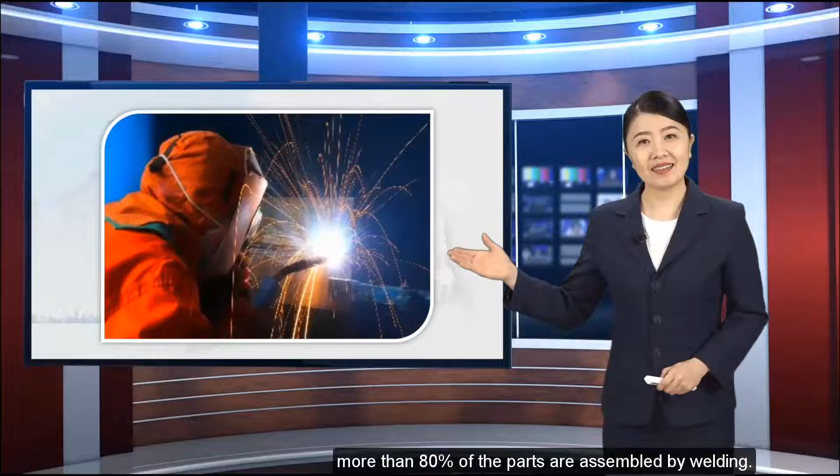The various buildings, bridges, pressure vessels, ships and even aerospace equipment. In the process of manufacturing, more than 80% of the parts are assembled by welding. Because of their size, they have limitations in turning over, especially when welding the outer plate. Nearly half of the welding work needs to be completed by vertical welding.

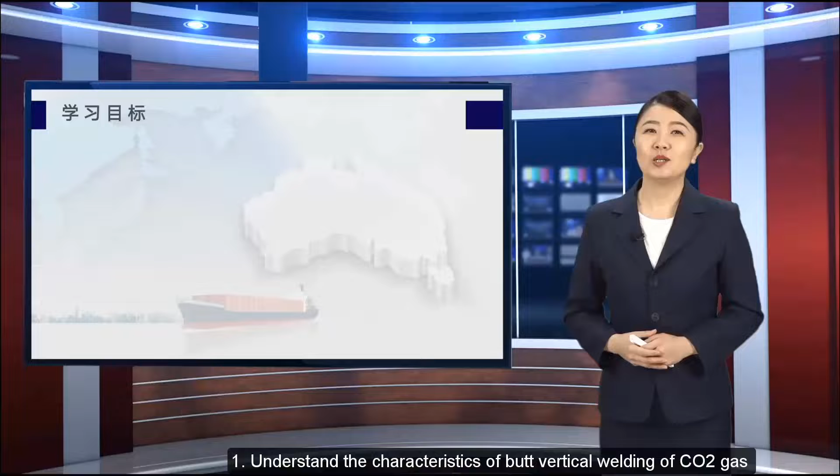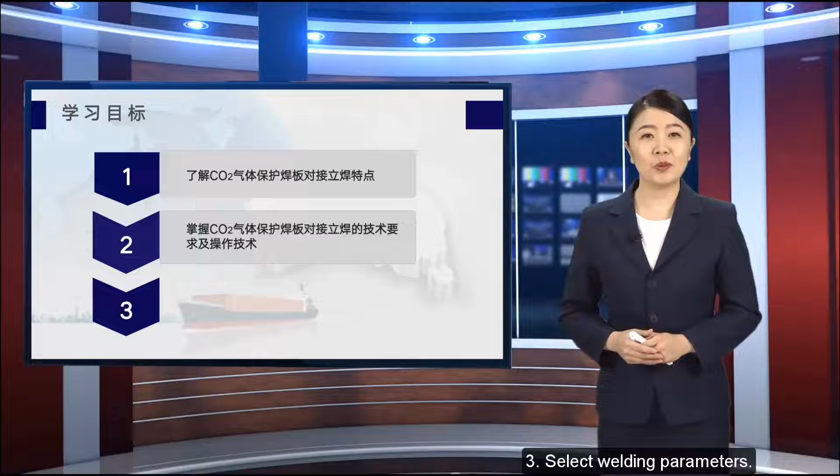Today we will learn CO2 gas shielded welding plate butt vertical welding. Learning objectives: 1. Understand the characteristics of butt vertical welding of CO2 gas shielded welded plates. 2. Master the technical requirements and operation techniques of butt vertical welding of CO2 gas shielded welded plates. 3. Select welding parameters. Please watch the animation on my right side.

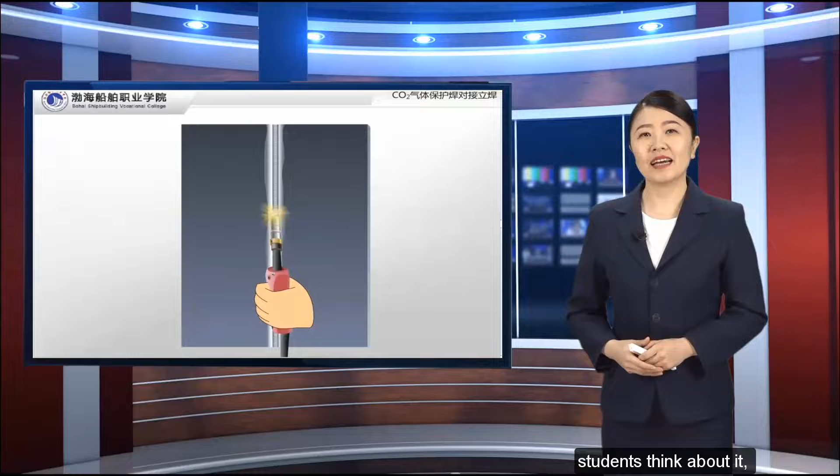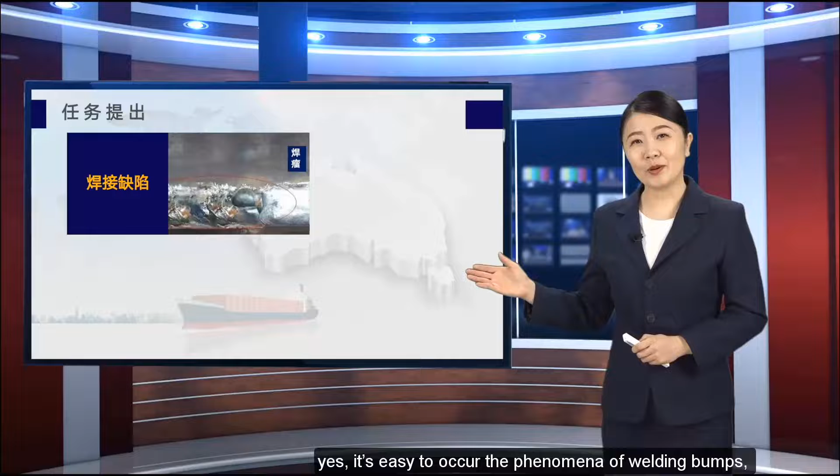It is not difficult to see that since vertical welding is performed perpendicular to the horizontal plane, students, think about it. What defects are prone to occur in the welding process? Yes, it's easy for welding bumps, undercuts, burn-through and others to occur.

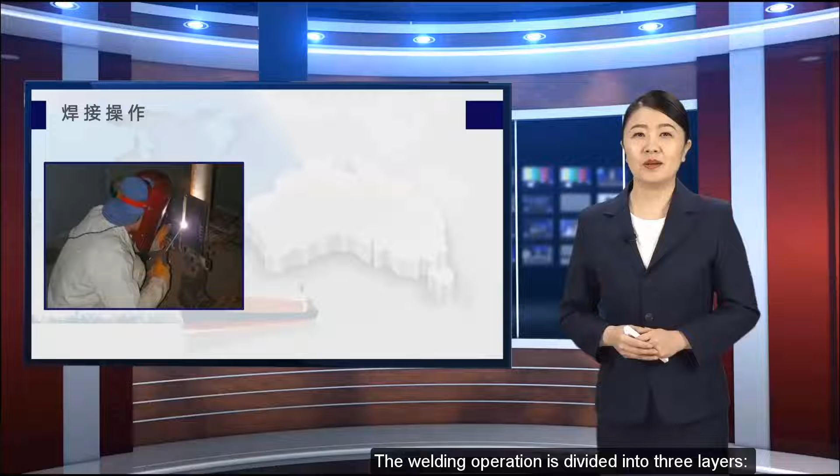Next, take a steel plate with a thickness of 12 mm as an example to explain the vertical welding operation of CO2 gas shielded welding. Please read the workpiece pattern. Complete the weldment production task, and meet the technical requirements of the workpiece pattern. The welding operation is divided into 3 layers: the bottom layer, the filling layer and the cover layer. Please follow along with my video to learn.

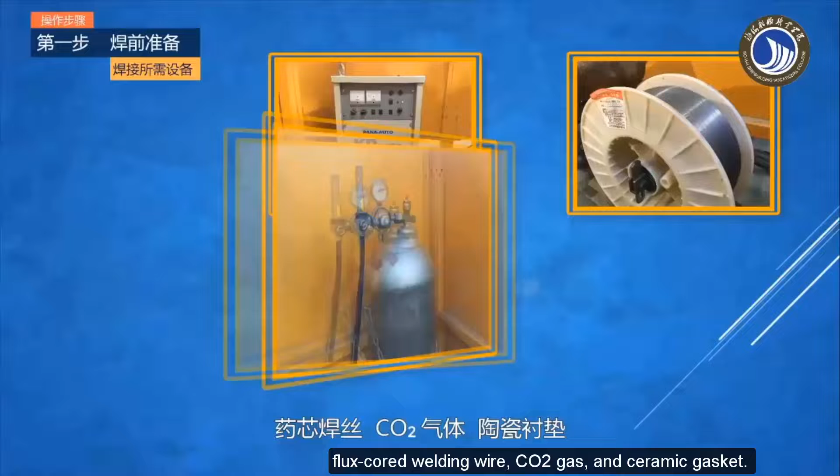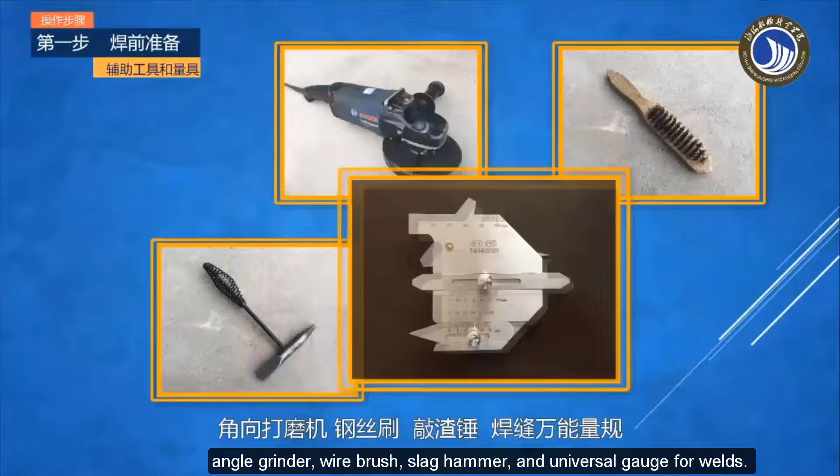Step 1. Before welding. The equipment required for welding is a CO2 gas shielded semi-automatic welding machine, flux-cored welding wire, CO2 gas, and ceramic gasket. Auxiliary tools and measures include angle grinder, wire brush, slag hammer, and universal gauge for welds. Labor protection equipment includes head-mounted mask, work clothes, gloves, protective shoes.

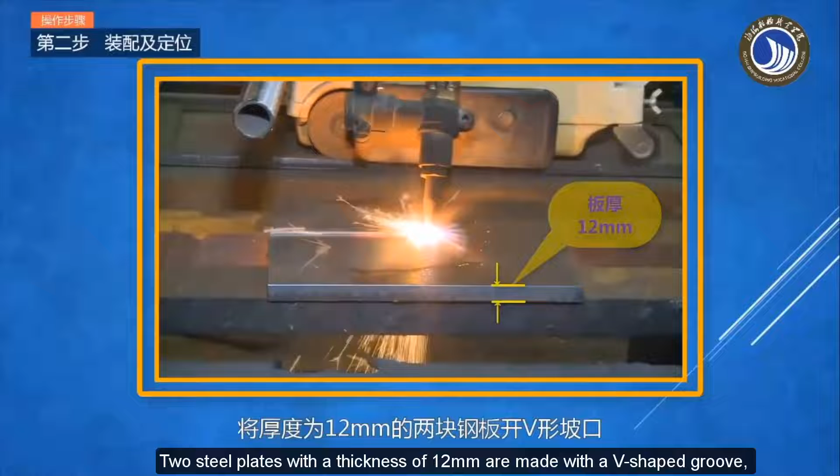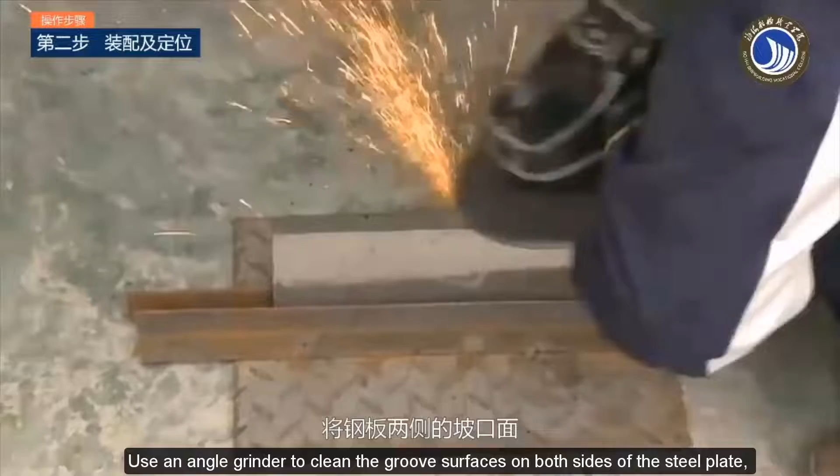Step 2. Assembly and positioning. 2 steel plates with a thickness of 12 mm are made with a V-shaped groove. The groove angle is 60°, and the blunt edge is 1 mm. Use an angle grinder to clean the groove surfaces on both sides of the steel plate, as well as oil and rust within 20 to 30 mm of the groove edge.

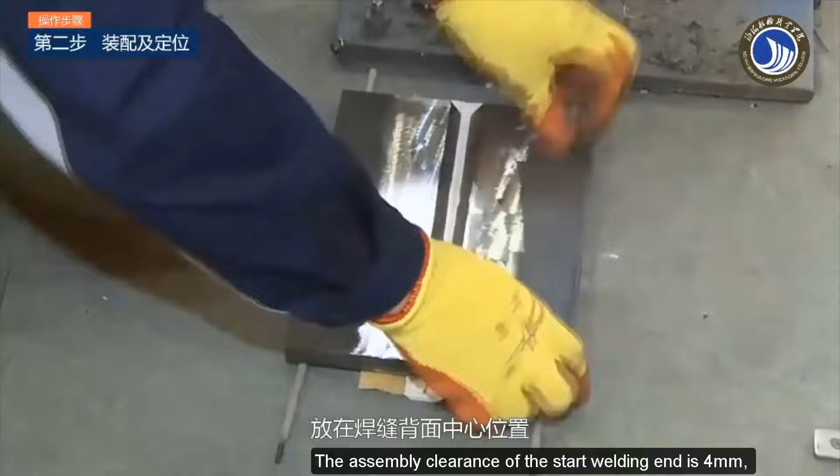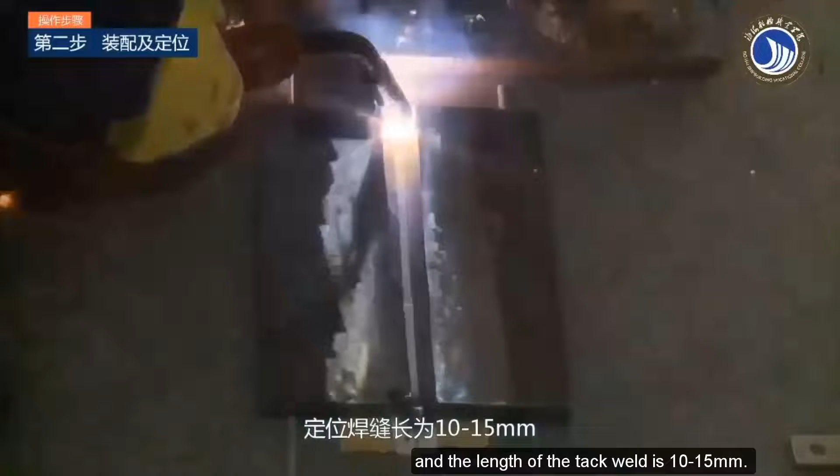And place the ceramic liner in the center of the back of the weld. The assembly clearance of the start welding end is 4 mm, and the end welding end is 5 mm. Tack welding is performed on both ends of the steel plate, and the length of the tack weld is 10 to 15 mm. The ceramic backing is then fixed to the back of the weld, and the anti-deformation is prefabricated at the same time. The amount of inverse deformation is 3-5°.

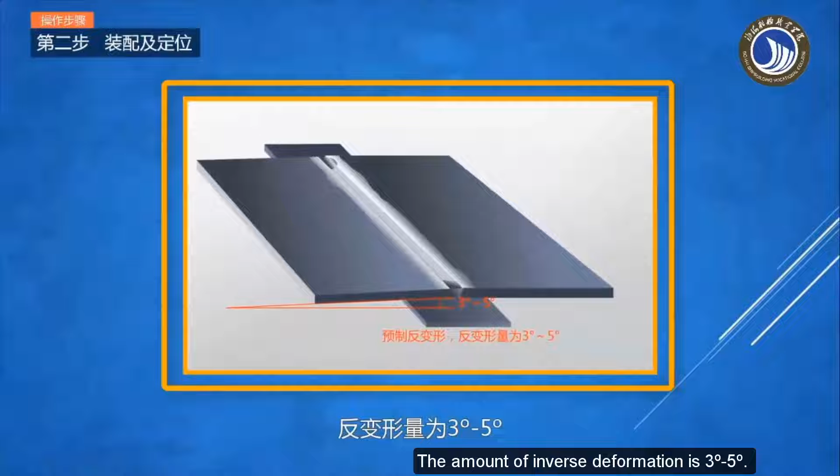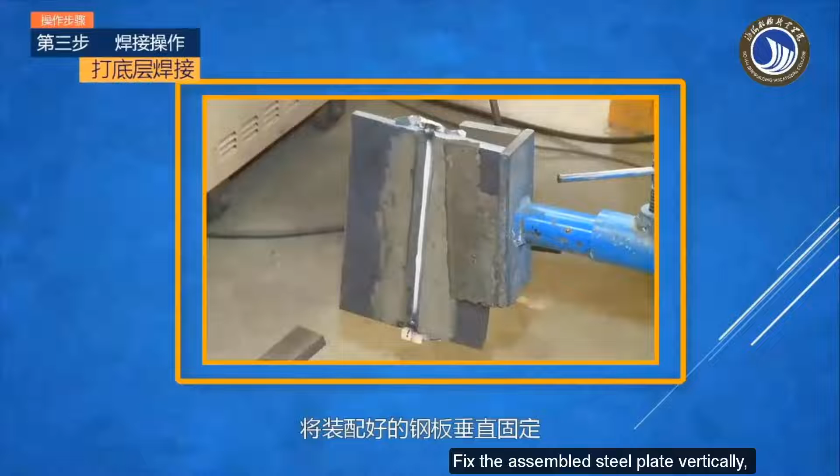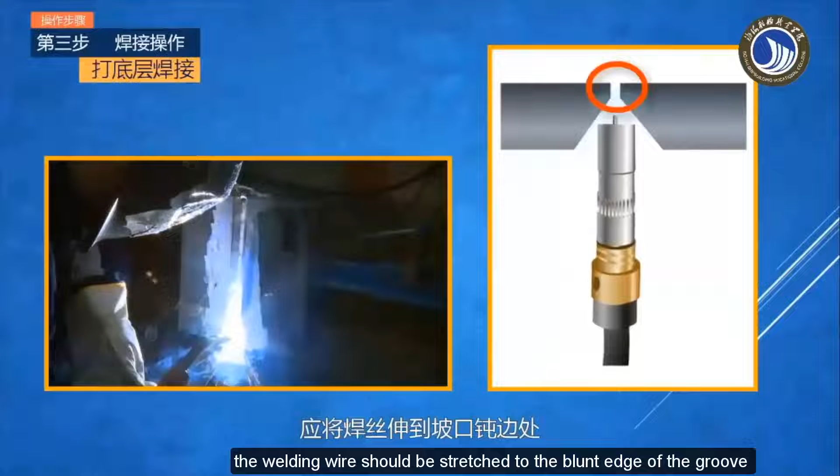Step 3. Welding operation. The welding operation is divided into 3 layers: the bottom layer, the filling layer, and the cover layer welding. Bottom layer welding. Fix the assembled steel plate vertically, and use a small current to weld from bottom to top. Start the arc at the lower end of the test plate. When starting the arc, the welding wire should be stretched to the blunt edge of the groove and swing left and right at the root of the groove.

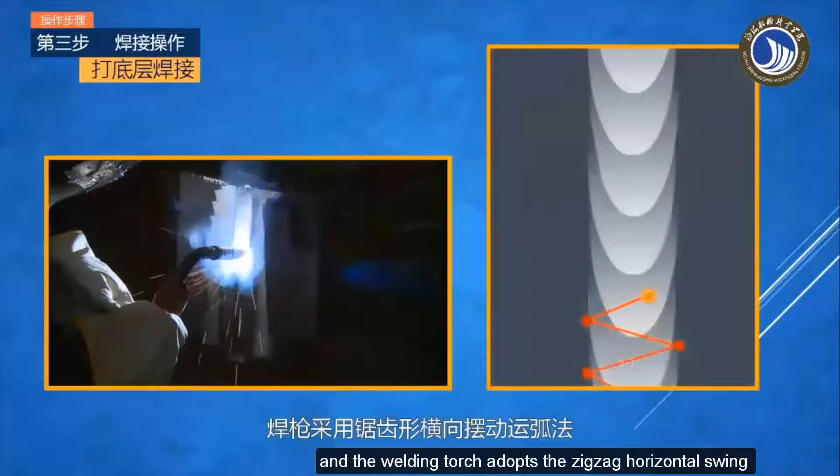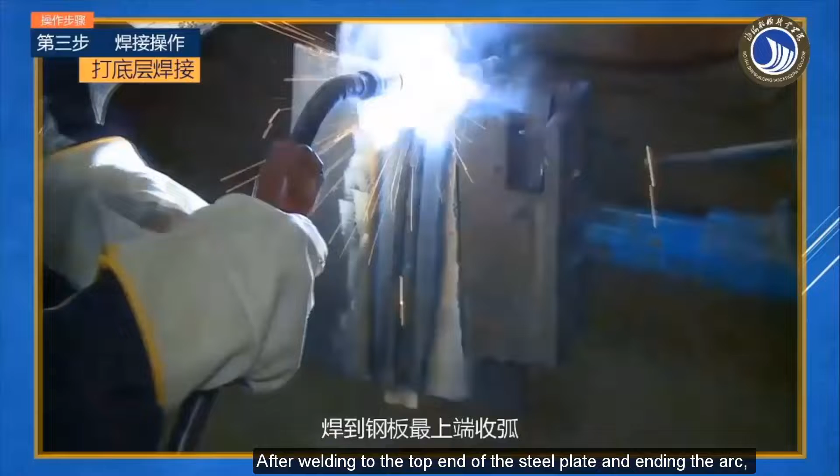The upward inclination angle of the welding torch is 75-85°. The angle between the welding torch and the weldment is 90°, and the welding torch adopts the zigzag horizontal swing arc operation method. When welding, pay attention to holding the gun steadily, and the welding speed should be uniform. After welding to the top end of the steel plate and ending the arc, the welding torch must be removed after the arc is extinguished and the molten pool is completely solidified.

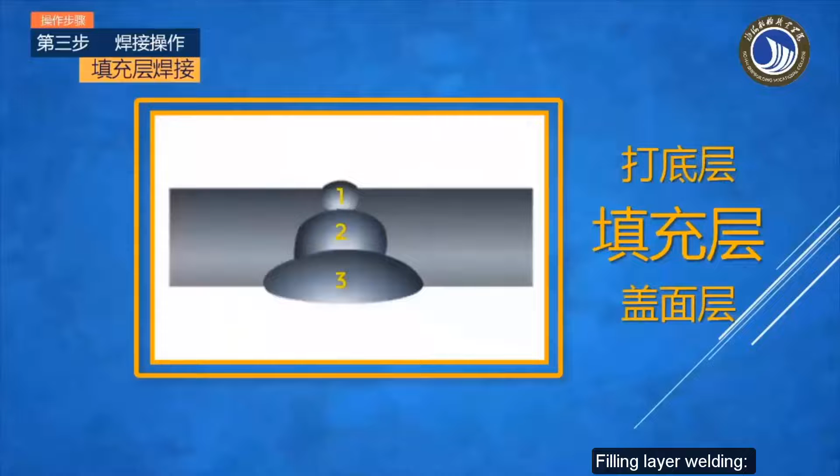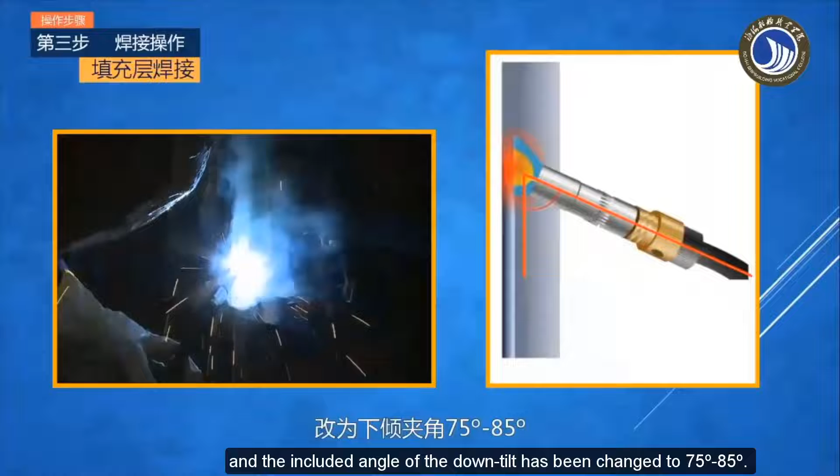Filling layer welding. Use a slag hammer and wire brush to clean the welding spatter and welding slag on the surface of the bottom bead and groove. When welding, also swing laterally from bottom to top along the center of the weld. However, the included angle of the welding torch has been changed, and the included angle of the down tilt has been changed to 75–85°. The angle between the welding torch and the weldment and the wire feeding method of the welding torch remain unchanged.

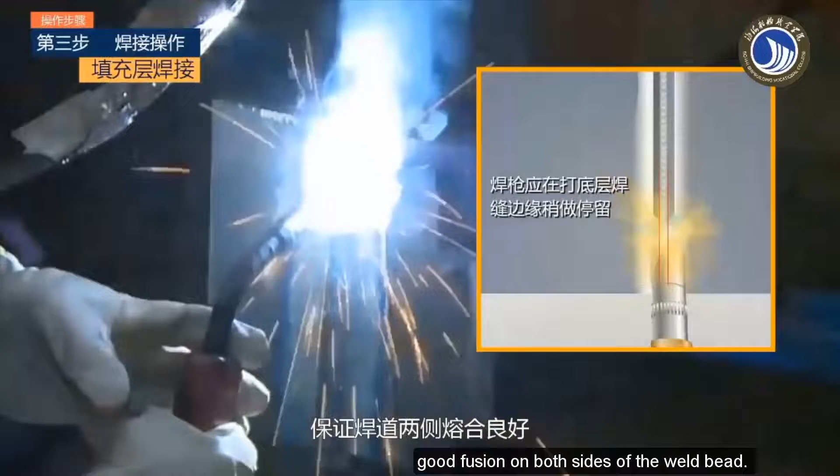The lateral swing of the welding torch is slightly larger than that when welding the bottom bead, and the arc should stop for a while at the edge of the bottom layer to ensure good fusion on both sides of the weld bead. Pay attention to filling the crater when closing the arc. Filler welds should be 1 to 2 mm lower than the base metal surface.

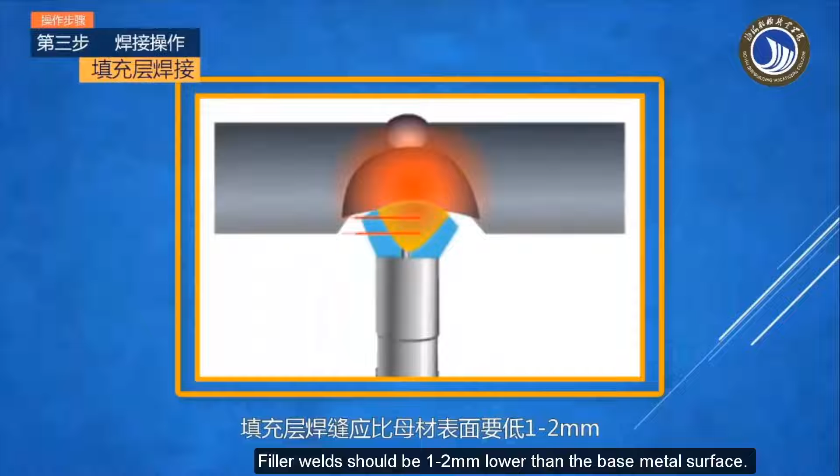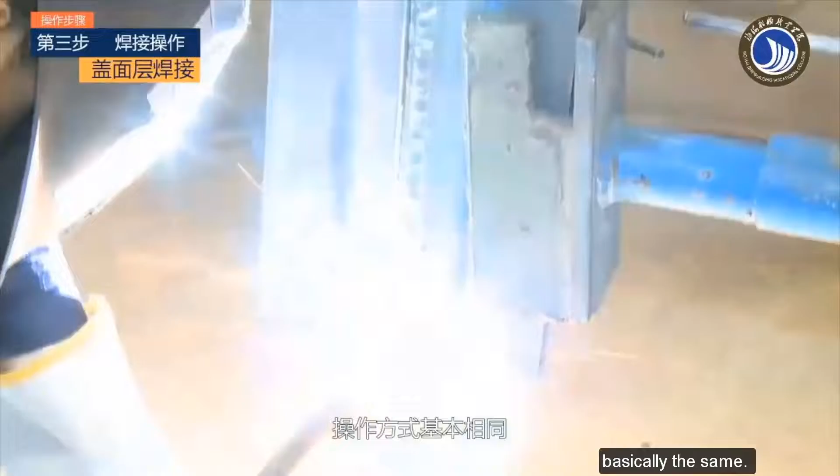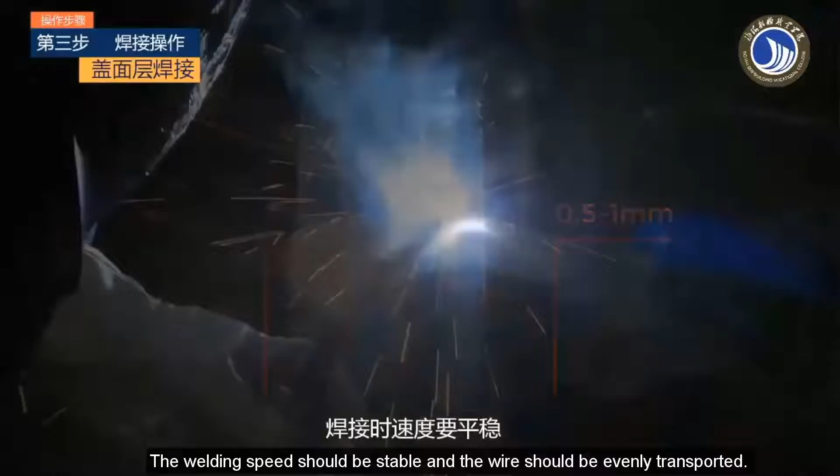Cover layer welding. The operation mode of cover layer welding and filler layer welding is basically the same. The slight change is that the welding torch should swing to 0.5 to 1 mm at the edge of the groove. The welding speed should be stable and the wire should be evenly transported. The shape of the weld will be neat and beautiful.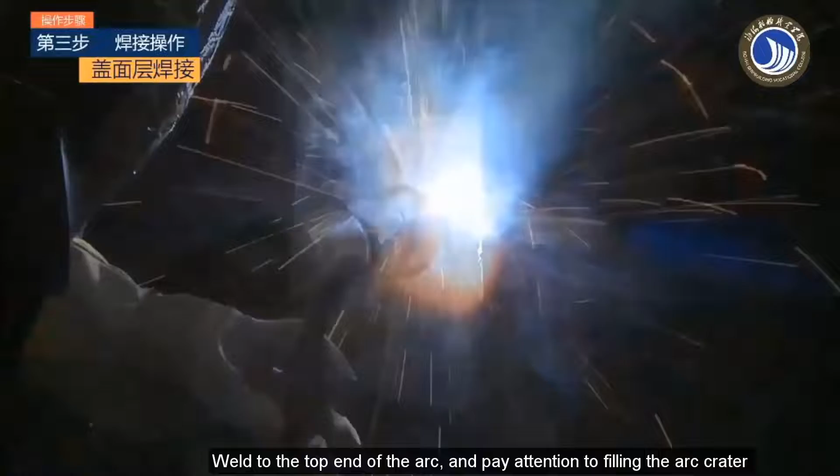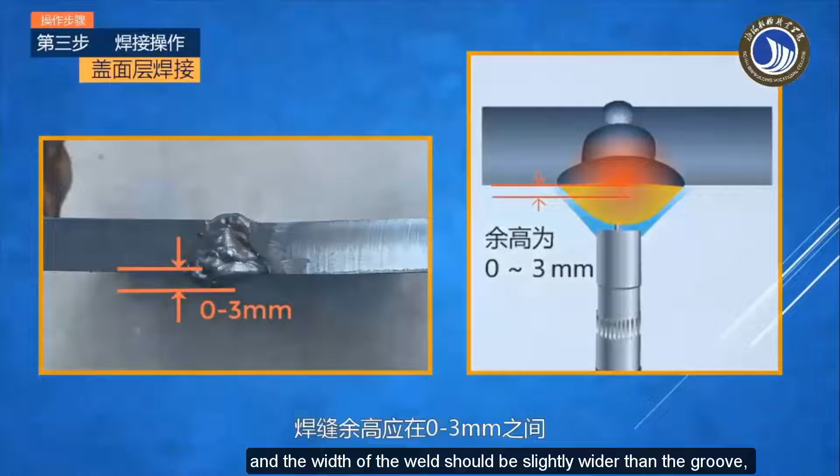Weld to the top end, and pay attention to filling the arc crater when the arc is closed. At the end of welding, the excess height of the weld should be between 0 to 3 mm, and the width of the weld should be slightly wider than the groove, but not more than 2.5 mm on each side. Through the operation video just now, we got the following skills.

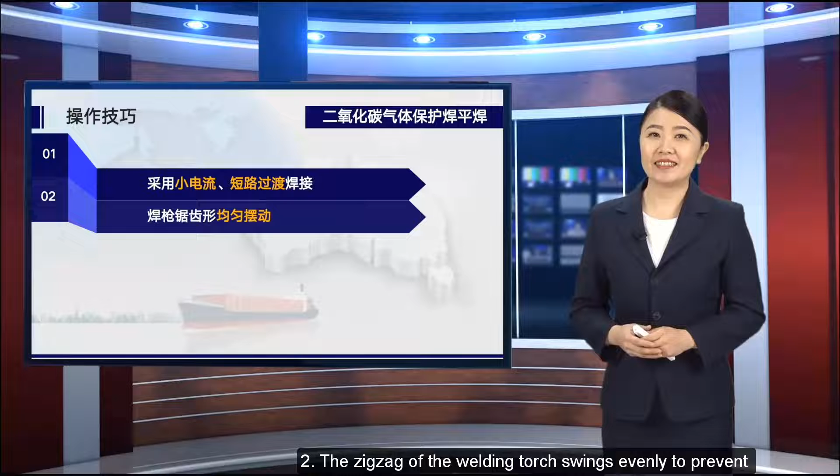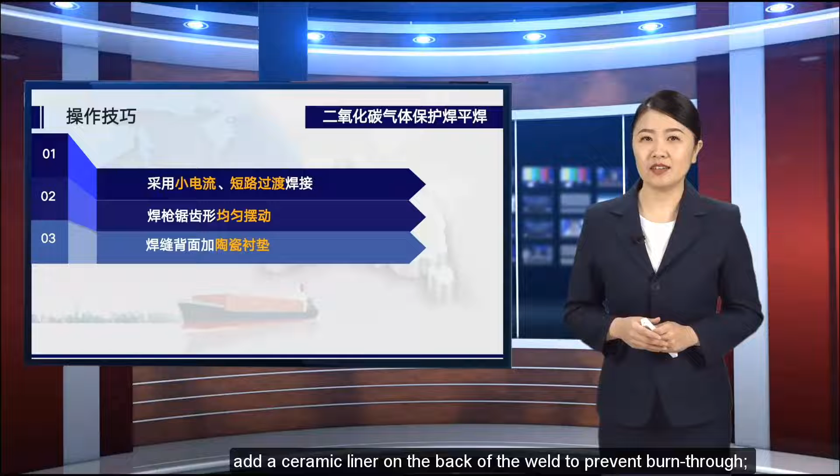1. Use small current and short-circuit transition welding during welding. The molten pool is small, and the molten metal is not easy to flow down. 2. The zigzag of the welding torch swings evenly to prevent the occurrence of undercut. 3. Before welding, add a ceramic liner on the back of the weld to prevent burn-through. 4. Pay attention to the angle of the welding torch for each layer of welding bead.